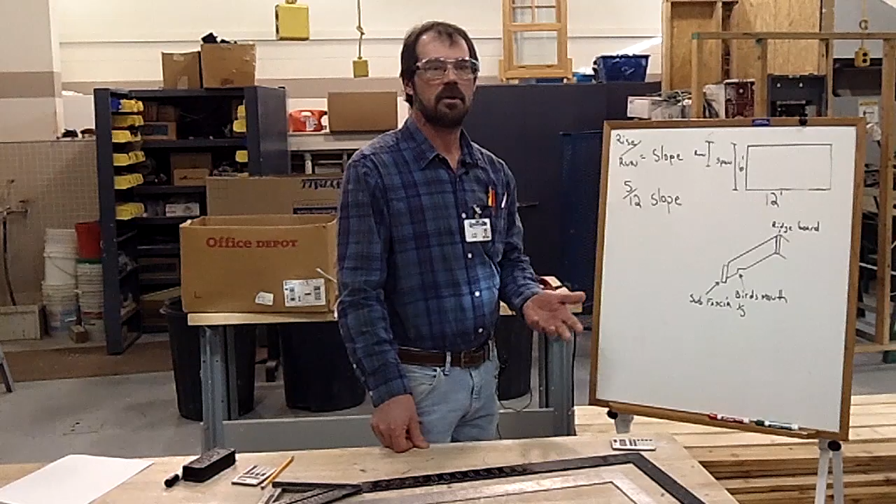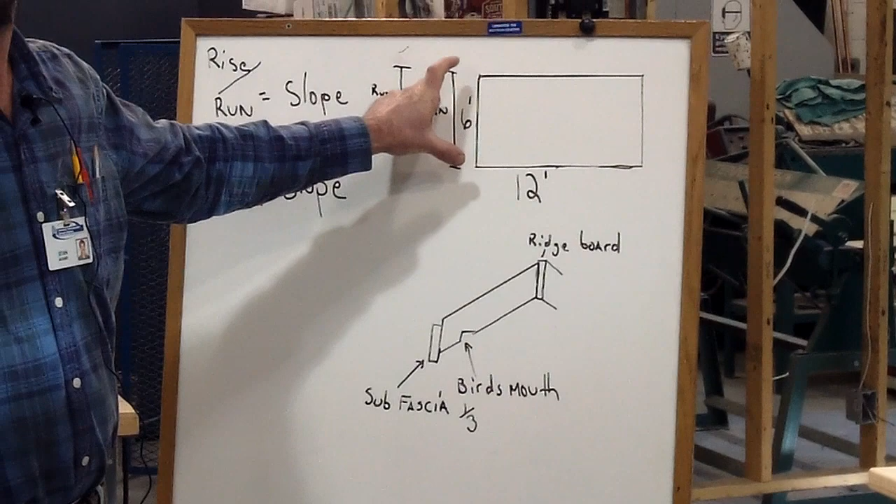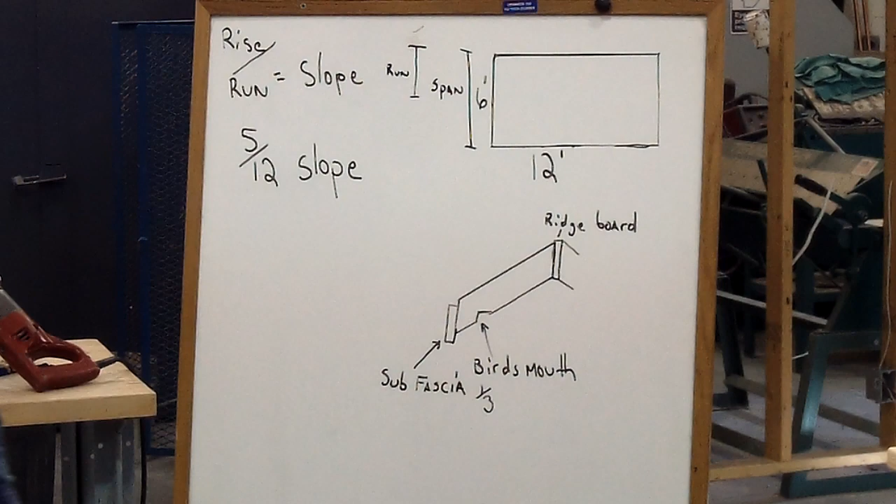All right, today we're going to go over figuring for rafters for a building and rafter layout. All of us have been through the chapter, so I'm just going to do a little refresher here. Span of a building is the width, the way that you are going to run your rafters, okay? That's the total width. So the span of this building would be 6 foot. Run is halfway, and that's what you're going to use to figure your rafters. And this is for common rafters, just a simple gable roof.

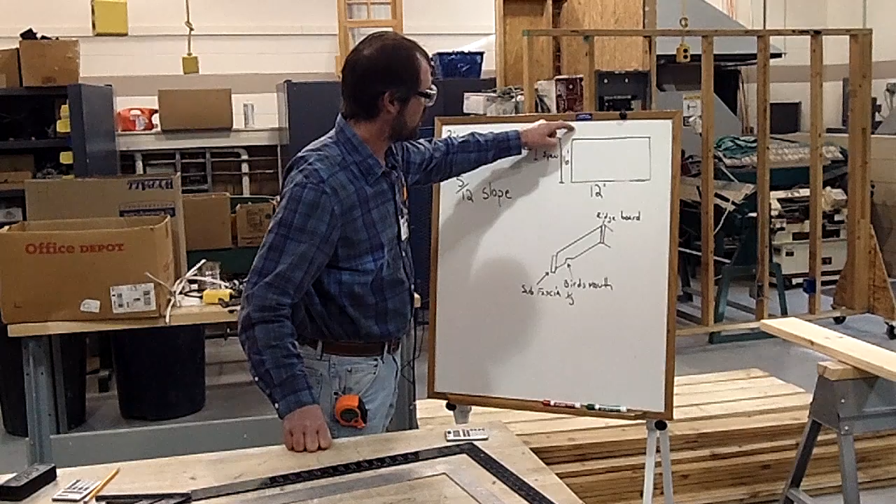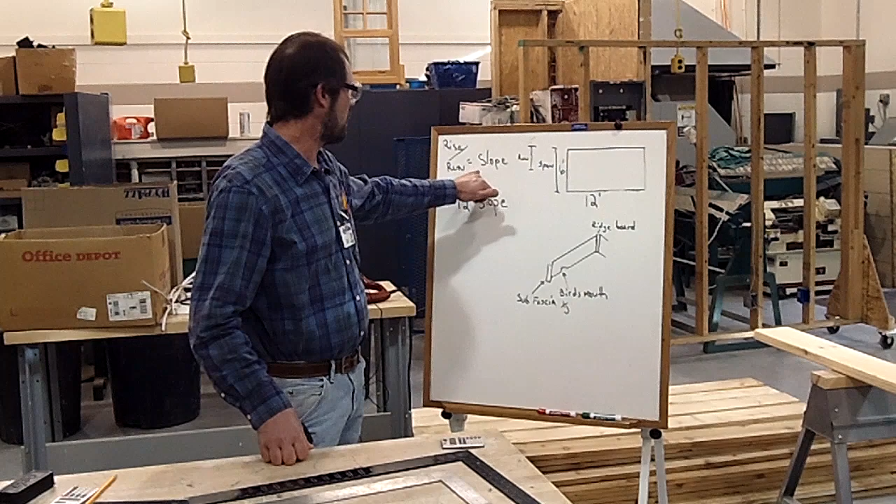So our run would be 3 foot, correct? Okay. Another thing you have to think about is your overhang for your roof, what would come by the building. Okay, we're going to say our roof is going to have a foot overhang. When they talk about how a roof has that angle on it, that's called the slope. If you looked at a print, it's going to give you the slope of a roof, what they want on it. And the slope is rise over run. You guys remember that from doing the chapter.

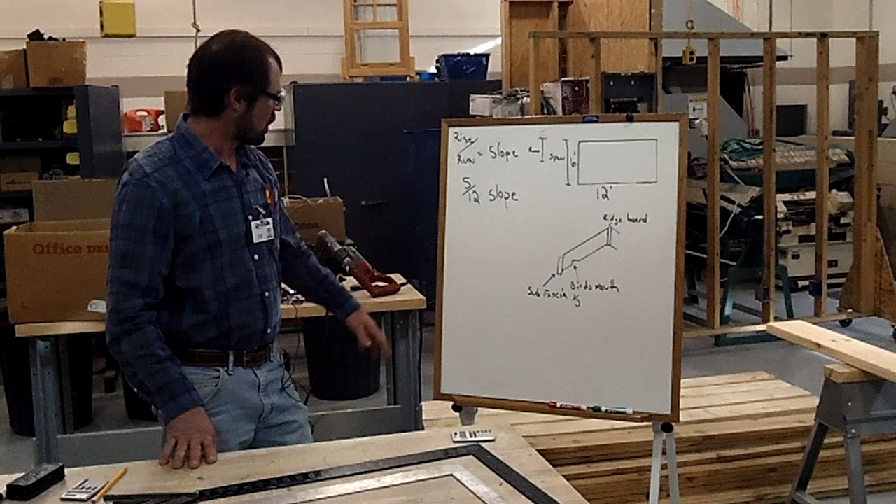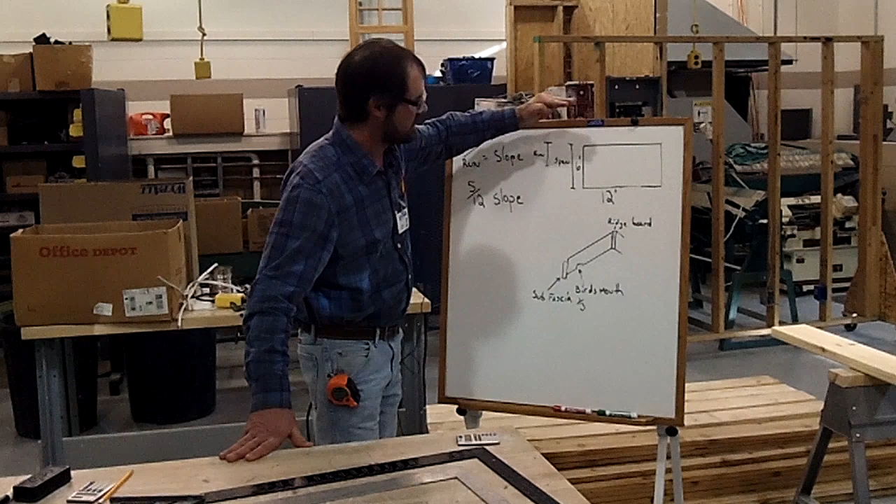So the slope we're going to use for our roof for our demonstration is a 5/12 slope. What that means is for every foot of this run, every time you come in here a foot, that roof rises 5 inches, okay? On a framing square, or what else? I'm trying to think of the other name. A what? Carpenter square, it's been called, but I think the book refers to it as a framing square.

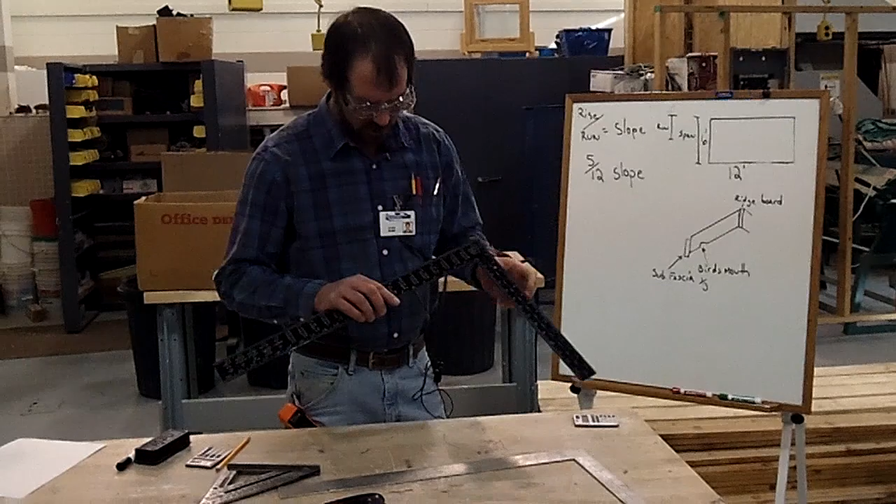There is a table on this portion of the square. Does anybody remember what this portion of the square is called? The leg. Leg? No. What? I thought you said it. Foot. No, blade. This is the blade of the square. What's this portion? The tongue, yes. Tongue and blade. The blade portion is 2 inches wide, the tongue is 1.5 inches wide. And they're really handy for a lot of different things when you're doing different layouts.

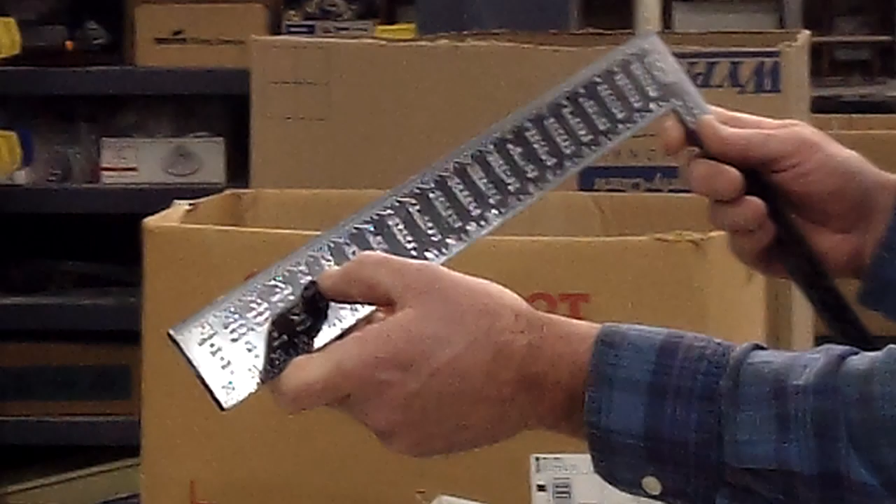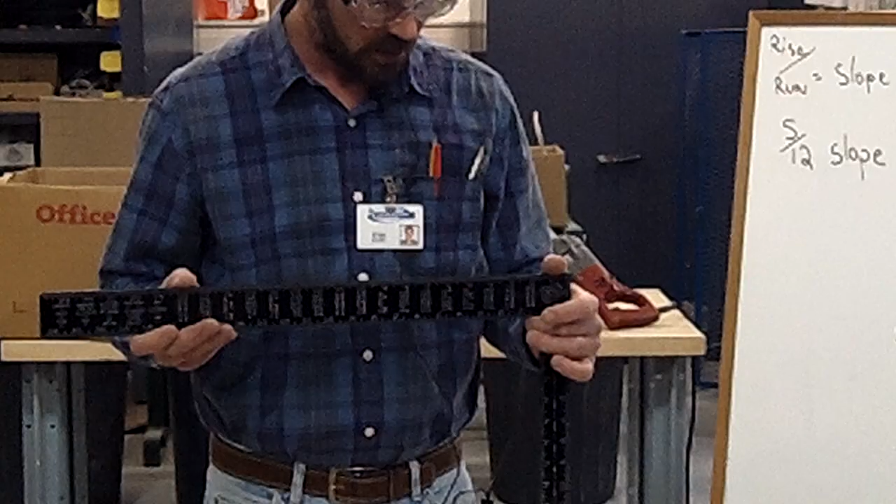Back to these numbers, there's a bunch of charts on here that help you. The top line says length of common rafters per foot of run. That's the one we're going to use, but the next row is hip or valley rafters and so on. There's a bunch of different type rafters on there. We're not going to deal with them right now, just a common rafter. Using the top line, we are going to put on this roof a 5/12 slope. So you go to 5 inches here on the blade, go to the top number, and it says 13. That means for every foot that you come in on this run, that rafter length is 13 inches. Does that make sense to everybody?

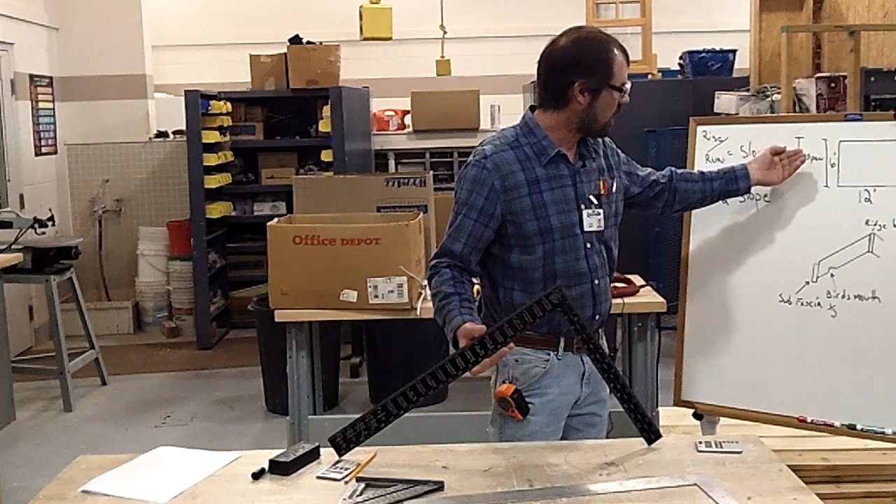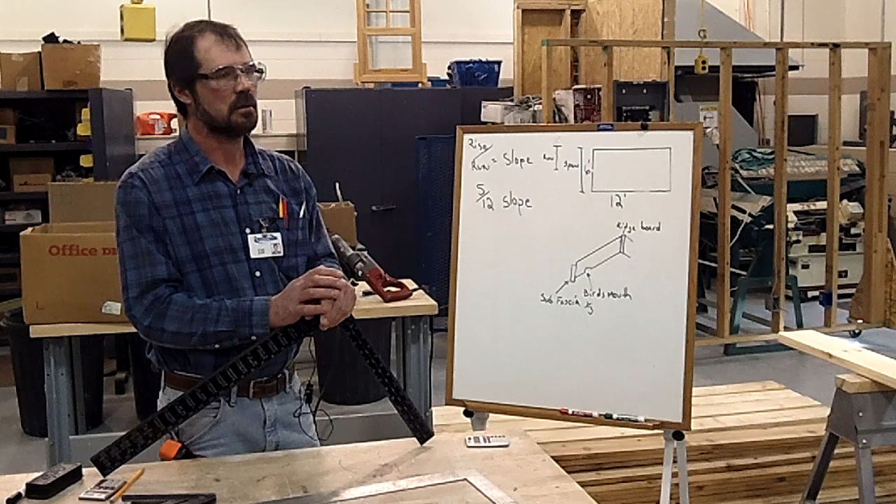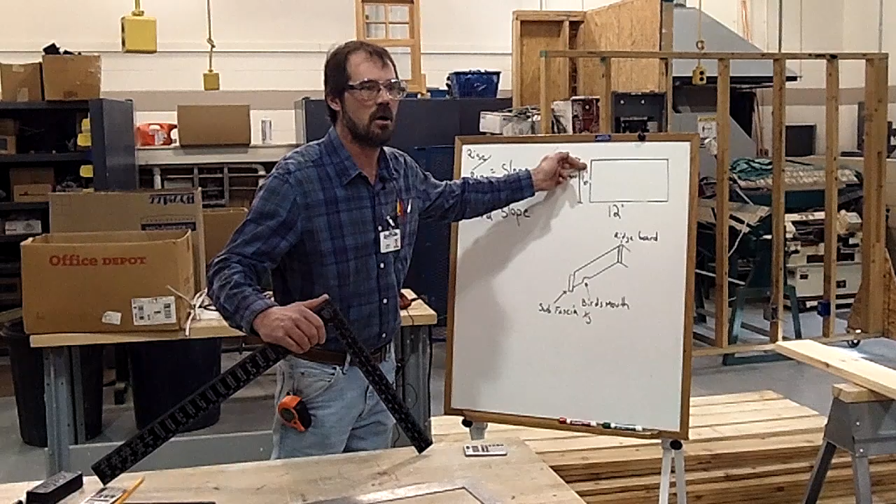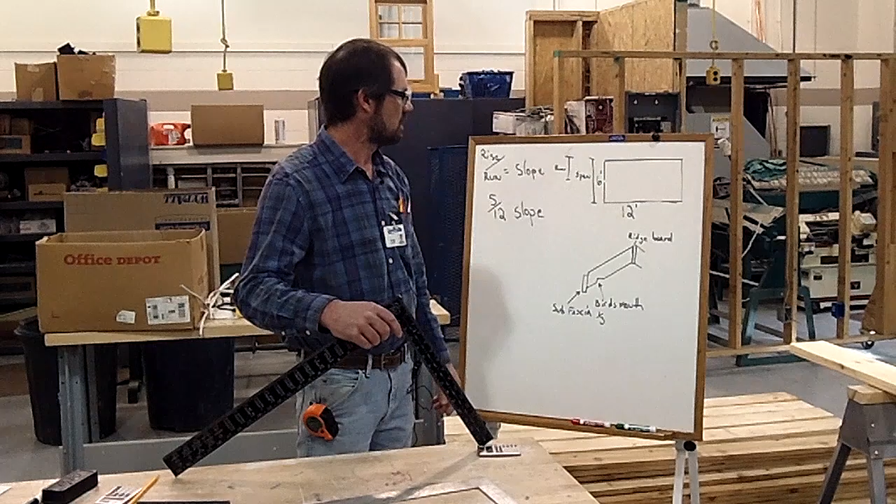So we're going to calculate, and I had all of you bring calculators in. We're going to say this building is the 6 foot building, so the run is only half of that, that's what your rafter would run to, halfway point. And we have a foot overhang. So what would be our total length of our rafter using those numbers? Remember, every foot you come in, it's 13 inches long. So if you come in 2 foot, it would be 26 inches long. I'm sorry? It would be 52 inches. What numbers did you use? I used 4. Times 13? Yeah. Okay, there you go.

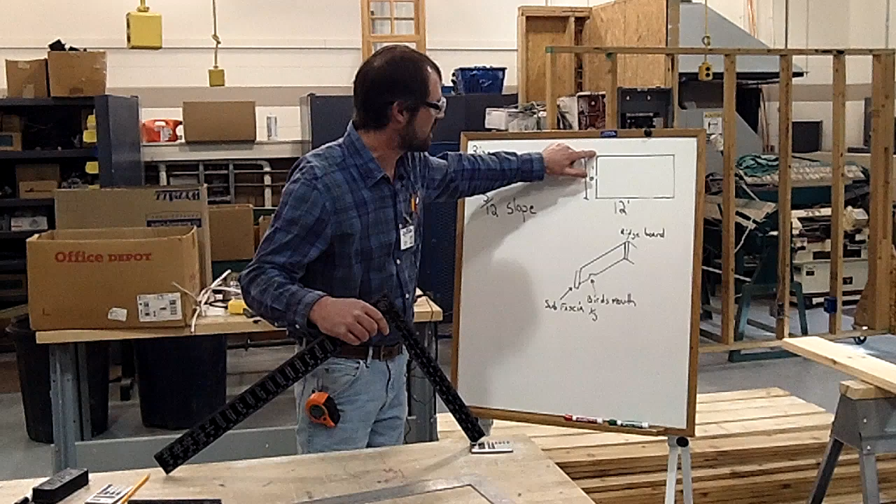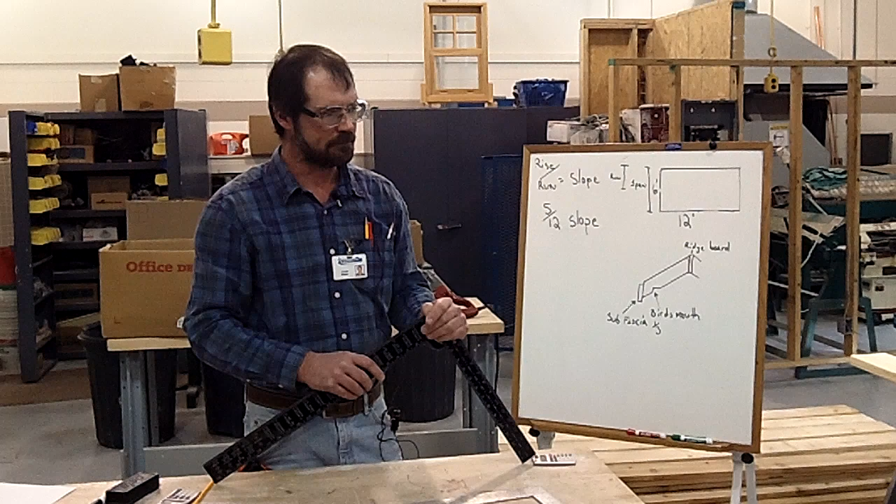Why did he use 4? Because you have the foot overhang. Right, because you have another foot of rafter sticking out here. So it would be these 3 foot, which is the halfway point, plus that one out there, which is 4 foot. Now, we are doing this because we're getting prepared to cut the rafters for that building out there. Everybody is going to cut a rafter individually. So I want everybody to understand this.

Normally when you cut rafters for a building, you cut one rafter and get it nice and perfect, and then you mark all your others off from that using it as a pattern, the first one that you've checked and it's good. We're not going to do it that way in here because I want everybody to have the experience of laying a rafter out.

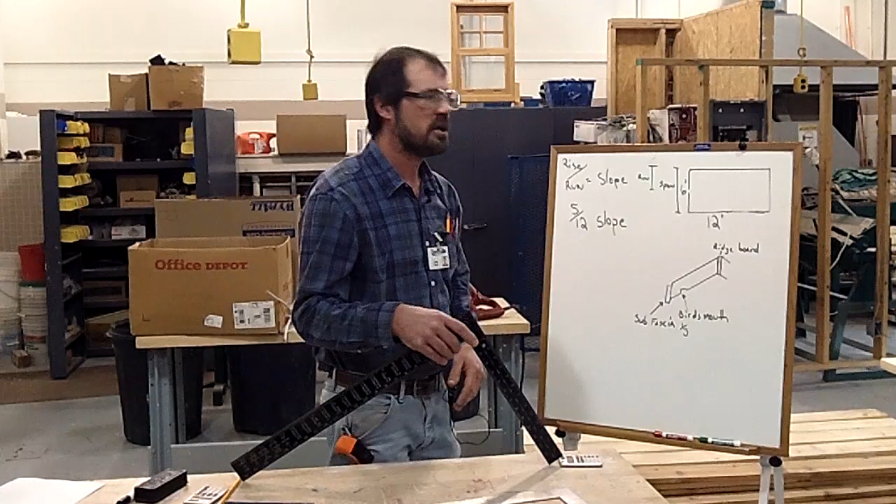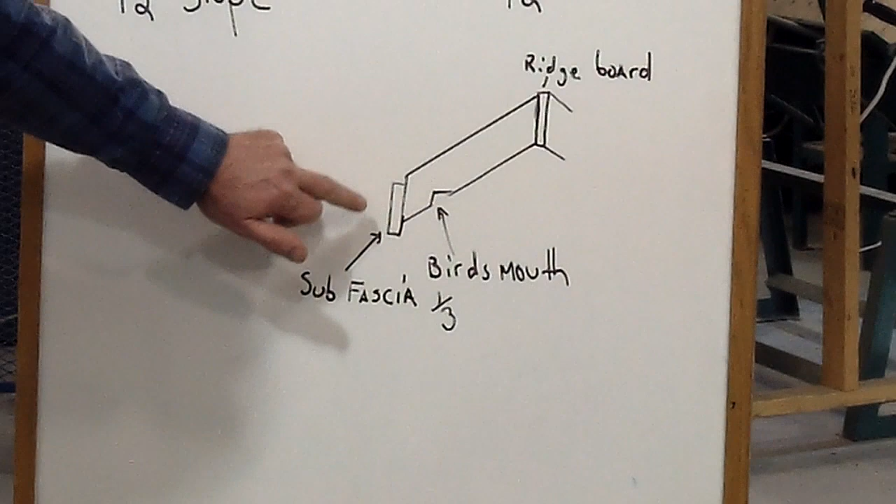So it's not going to be done off a pattern. So some other parts of the roof that you have to deal with, and we'll get into this a little bit later when we cut our rafter. You have what's called the subfascia, which is normally a 2x6 nailed on this edge here. You also have the ridge board that runs down the middle. Okay, your ridge board can vary.

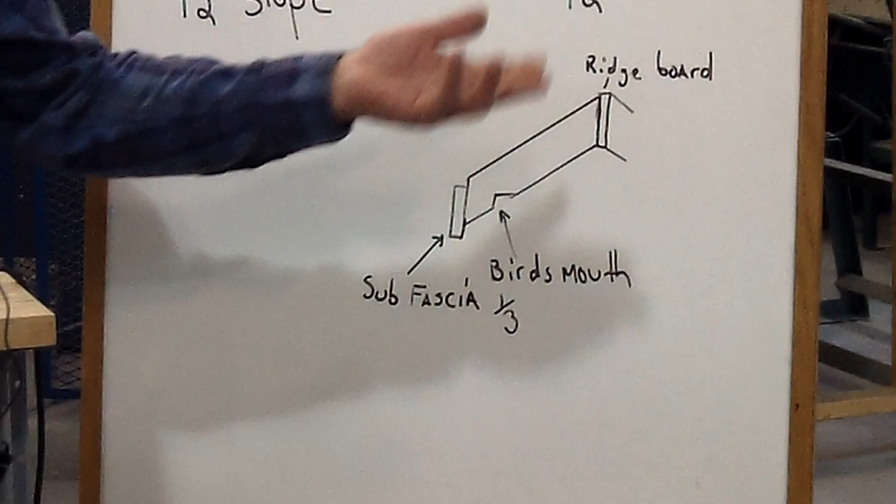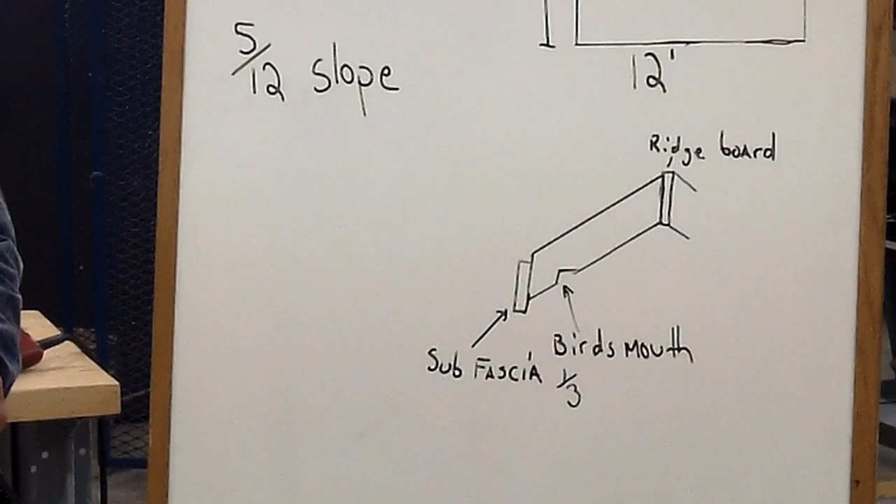On a small roof like this, it would be 2x material, which is 1.5 inches thick, but it's not always 1.5 inches thick. It may be a laminated beam for your ridge board. Depends on load bearing and that kind of stuff.

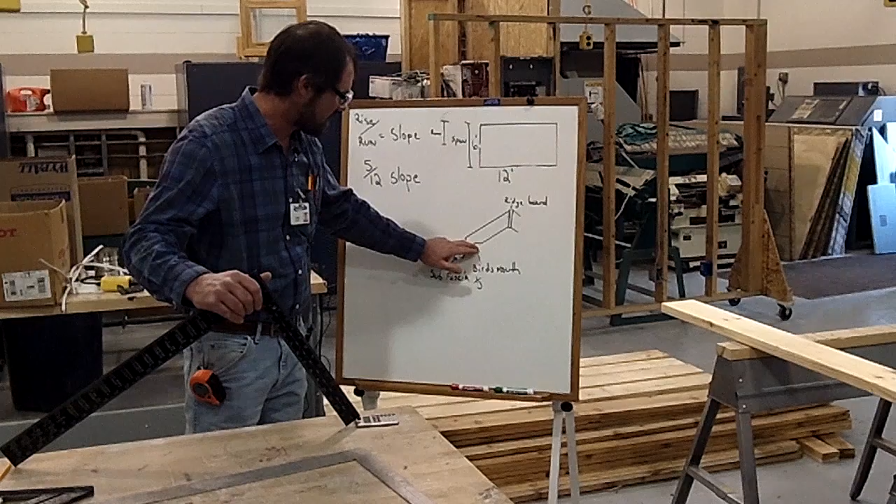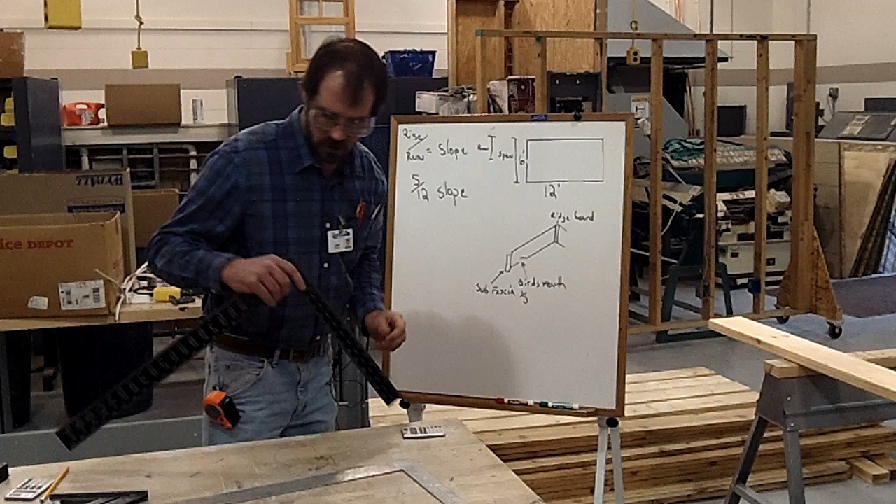And then there's also the bird's mouth, which is this notch out that locks onto your wall. So your wall line of your building here on this exterior wall would come right up into that bird's mouth right there, and it kind of locks in. Your double top plate would be here. Ties that in so it can't move. Of course, that has to be in a certain location.

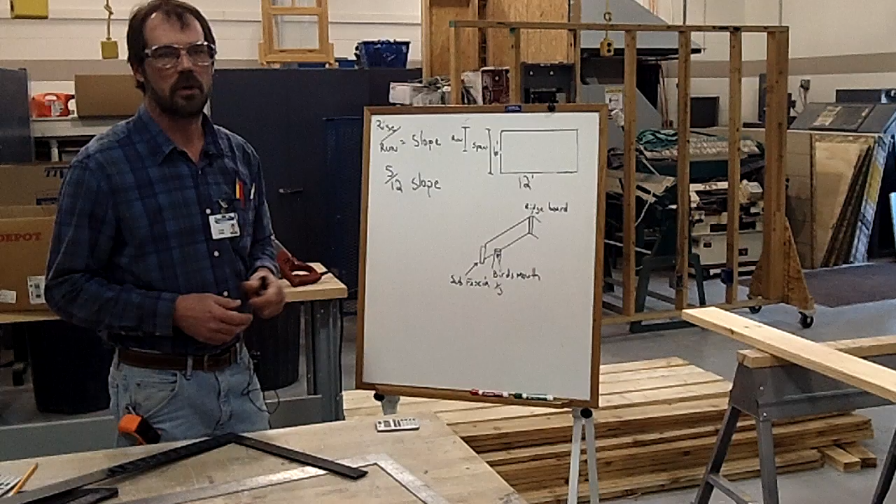Rafters are really picky. You got to be precise. 1/16 off is passable. More than that is not good. They're not going to fit correctly. So you have to be really picky with how you mark these, and not only mark them, but you got to be careful how you cut them.

So we're going to move over here to laying out a rafter, and I have a board here. So how long did that have to be? 52 inches. So our board is over 52 inches. I got 66 inches. But you figured it at 52 inches, you wouldn't want to cut your board off square at 52 inches because you would be short.

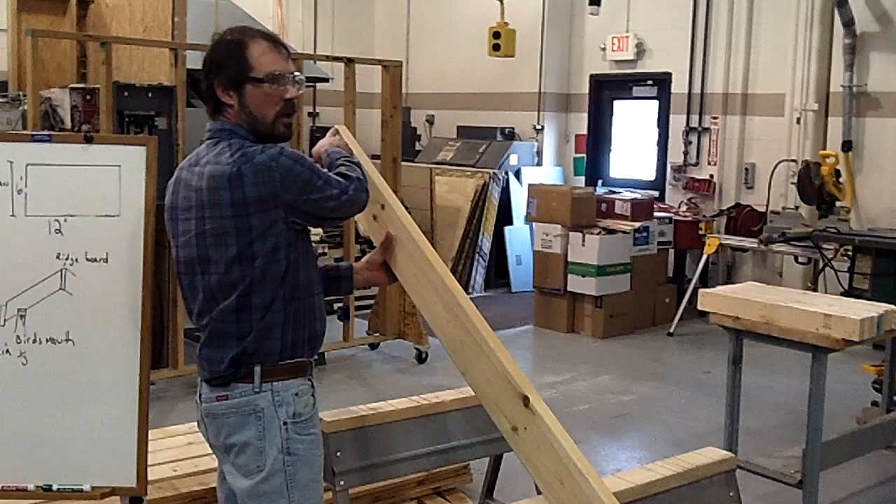Because when you look at a rafter going up, this is going to have an angle cut on it, and this is also going to have an angle cut on it. That measurement is from the long point of this angle to the short point of this one, but it actually gets longer down here. So if you cut it right at 52, you would be short. So you got to be careful with that.

So on this, these are really short rafters, but good practice, just like your floor system, just like your wall studs, you would want to crown your board. Does everybody remember what crown is? Okay, crown is the bow up, or crown down would mean this board was bowing like this. But you always want your crowns up because weight's going to push it down.

So if you're already bellied down and then that sags more, it's going to be really drastic, and you're going to see it. There's going to be a dip in your roof. So you'd always want crown up. So I have my crown up facing that direction. And you're going to start out with your framing square.

Now, placing this on your board to mark it, this is your angle. This would be what would be called your plumb cut at the top or the bottom. Plumb is perfectly straight up and down, right? Level is horizontal, and plumb would be vertical. So you're dealing with 1 foot, right? Does anybody remember what this method's called when I keep walking down through here marking these? The step-off method. That is what I want you to use, okay?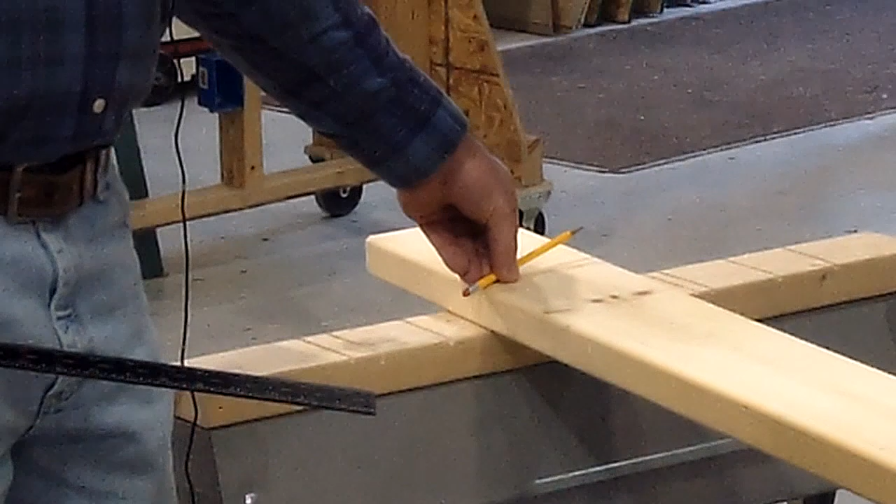Now what should that measure from long point to short point, if we did it correctly? Remember the number on the square. What did we use? 13 inches, right? It was 13. So this should be 13 inches. And it is, okay? So there's one way of checking yourself if you're not sure. So I'm going to move to my next step. Got a 5 and 12.

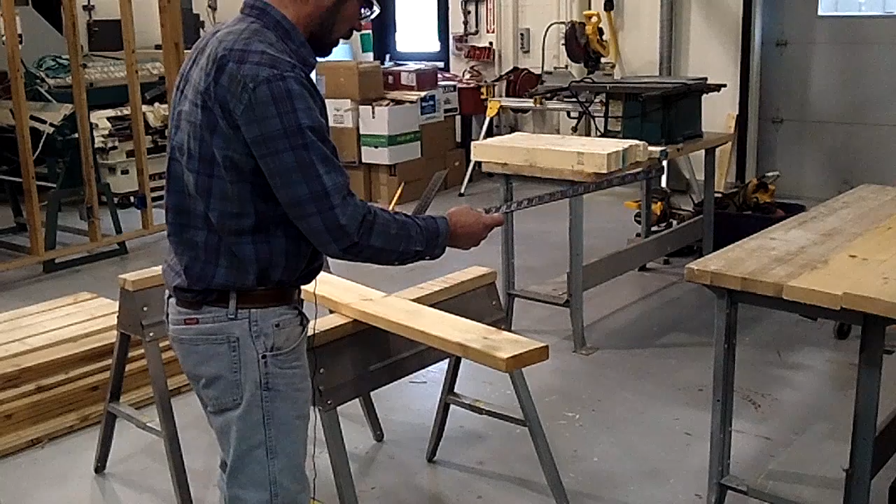So there's 2 foot a run. And 12, and there's 3 foot a run. Okay, so I needed 4 though, correct? So to get this last one on there, if I hold this at 5, I can't get to my 12, it's way out here. My board's too short for that. So here's where sometimes you have to use other parts of your square, or maybe go off the top.

So I can do it, not like that. I can do it back this direction. So I could go 5, I'd be better off on the other side. 5 and 12 should line up with my other mark up here, right? And 5, and that will get my, what would be my overhang right there.

Another thing that sometimes you have to use, you can tell slope a roof on this also, but you got to make sure you're on the right line. It says common right there. So these are the common slopes. So right there's your 5 on that mark right there. This point here, and it always is labeled with an arrow pointing to it, or it's labeled, this is your pivot point, okay? So if you have your pivot point, we'll just double check this.

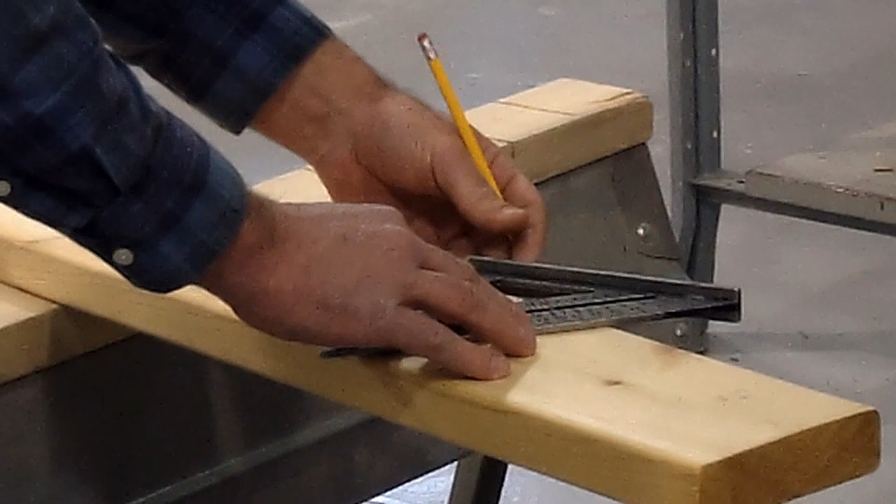So if you have your pivot point here, you're going to hold that tight to your board. Whatever side of the board, it's no different than using those squares. You got to stay on the same side of your board. That's the one you would want to line that 5 up with. So if I got right on my line and I moved it out to a 5/12 to the edge, it should be right on my line, which it is.

Okay, so there's another way that you can put that 5 or 6/12 slope, whatever you have. So I have my 4, right? 3 is the run of the building, correct? So your bird's mouth, realistically, this should be the outside wall right here, this line. So your bird's mouth comes back in to sit on the wall, okay?

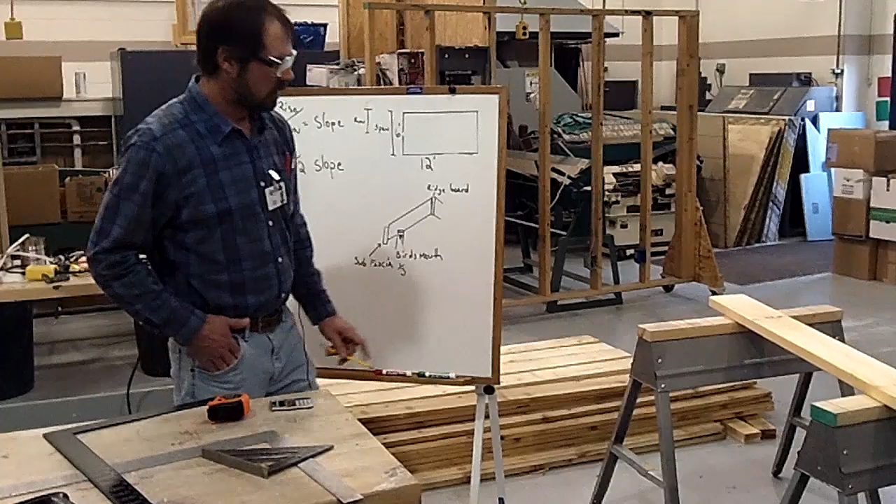Now, there's a certain distance that bird's mouth can come up that board. That would change if you had a bigger or smaller rafter. What that bird's mouth can be is 1/3 the thickness of your board. So this is a 2x6. Does anybody know how wide a 2x6 is? How much? 5.5. Okay. It is 5.5.

So what is 1/3 of 5.5? Go ahead. I'll wait for you guys. This is why you brought your paper and pencil. Just thinking about this, if it was 6, 1/3 would be 2, right? So you know it's smaller than 2. If it was 1.5 inches, 3, and another 1.5 inches, 4.5, right? So it's bigger than 1.5 inches, but it's smaller than 2. So you know it's going to be someplace between there.

Garrett, you got a number? I got 1.8. What is 0.8 of? Well, you know 0.5 is half, right? So what is 0.3 then of an inch? 1/3 of an inch. 0.3. What do you think it is? You know it's bigger than, yeah. 0.75 is 3/4, yes.

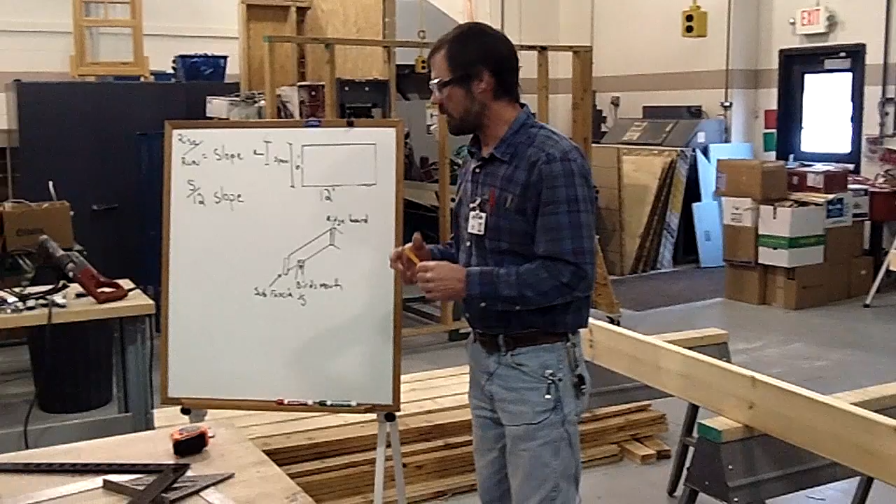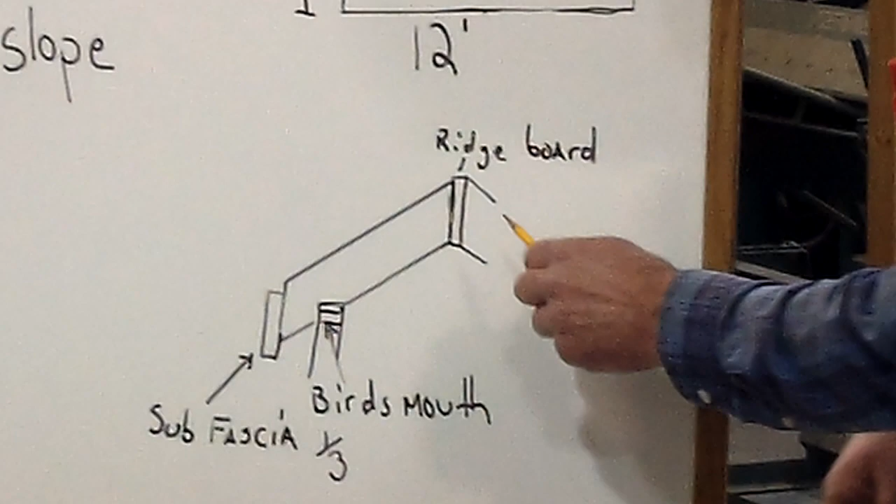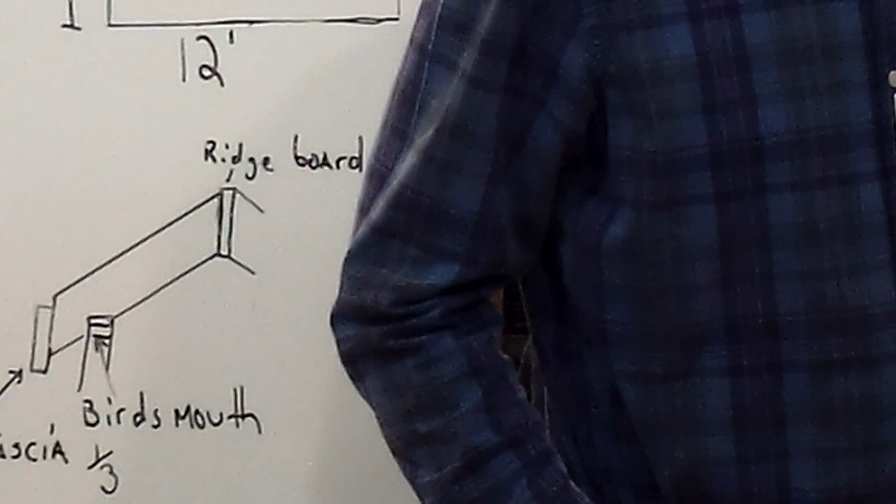That's what you would want to do, check them before you got cut crazy. Check them, maybe check them at the other end of the building, make sure they're fitting everywhere. But something else you have going on here that takes up part of this space is you have a ridge board, okay? You do not want to right away take that distance off. You always want to check first, because if you go ahead and cut what you needed to off to take up the space of that ridge board and then got up there to try to check, you'd be messed up if it was a little short. But if you checked it while it was still big, you have a little bit of room for adjustment there. So you don't want to take them deductions out without checking them.

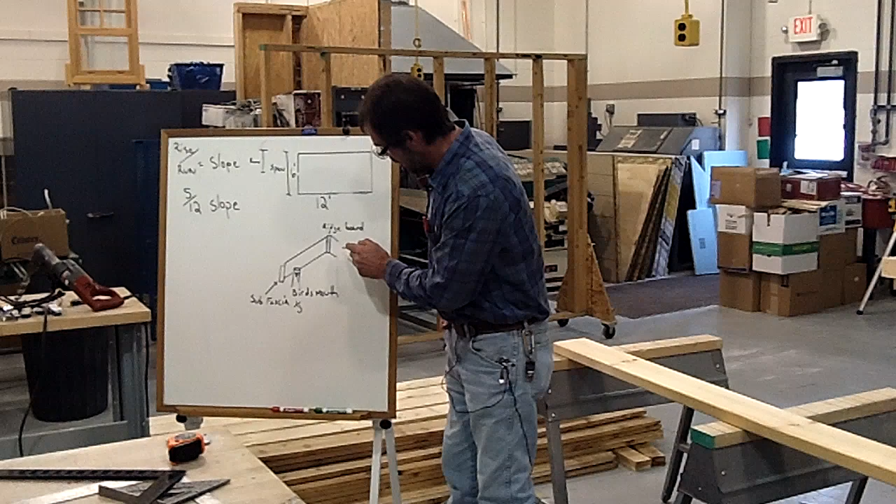But say we have this cut and we've checked it and it's good. Now you would come back and you're using a ridge board. Our ridge board is going to be 2x material, which is how thick? 1.5 inches. So do you think you take 1.5 inches off this so it'd fit? What would you take? You'd take half that. Whatever your ridge board is, you'd take half that distance. So we want to take 3/4 off from this, okay? So another deduction you have is down here on the end. You have your subfascia board, which is actually building your overhang out.

So you'd have to make a deduction for that. That's going to be 2x6, which is 1.5 inches. You have to take that whole distance off, correct? Okay. One thing nice, and this is what I talked about, there's a lot of uses for a framing square. This, which is called the what? Tongue, is 1.5 inches thick. So if you lay this right on this board, right on your line, and mark the other side of it, that would give your deduction for 1.5 inches, right? So there, you got that taken care of.

Now, myself personally, after you've built a lot of things and you get to something bigger, wood is not perfect. Walls sometimes do not get straight and perfect. Sometimes you have to, I want to say, mask issues and where you can hide things. Overhangs are one place where you can hide imperfections. But if somebody looks down an overhang and it's going like this, it's terrible. I mean, that really sticks out.

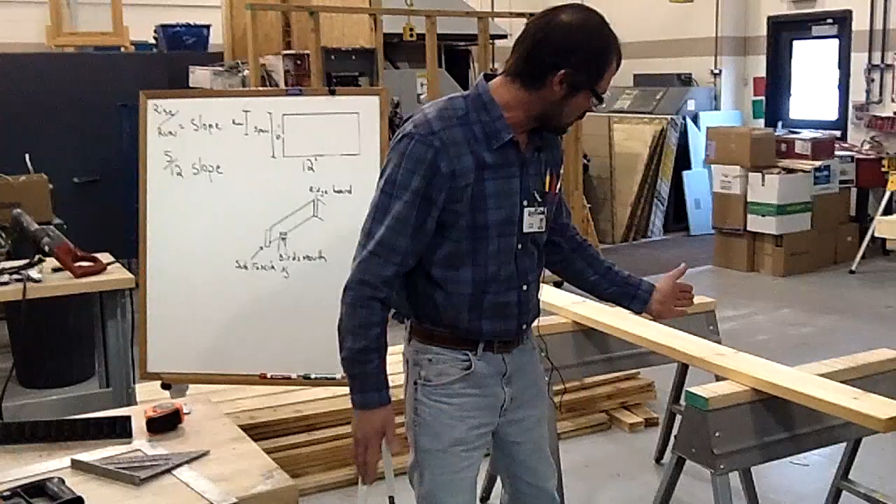Does that mean then you just hit it with a hammer and knock it out of there? Well, you could flip it over and cut from the other side and you still probably won't get it all. You could do that, which means you should have some nice fine lines over here too, right? Or you could take a handsaw and finish that cut with a handsaw, and that's what I prefer to do. And it's the same way with stairs. You don't want to overcut that stuff. But we haven't really dealt too much with cutting with a Skilsaw on angles, coming across the board with an angle. So that's kind of why I want to show this a little bit. I'm going to go ahead and shut this off.